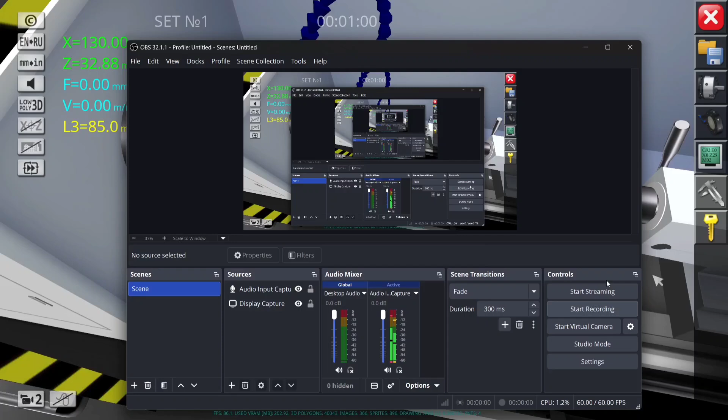Good day, I am here to demonstrate to you how to do stock removal in turning using our program called CNC Simulation Lathe Machining. So this task is assigned to us by Doc Louis Villaverde.

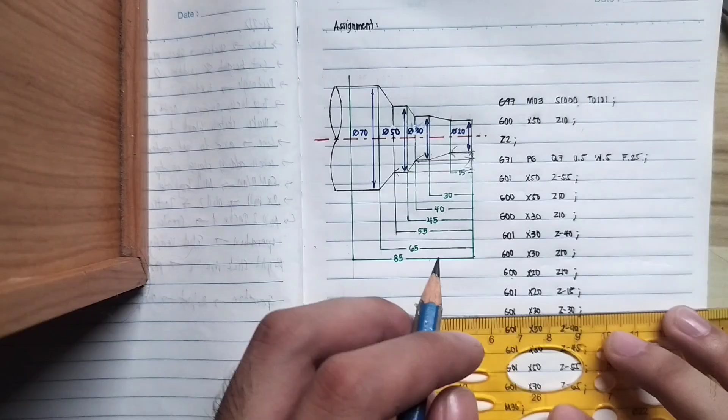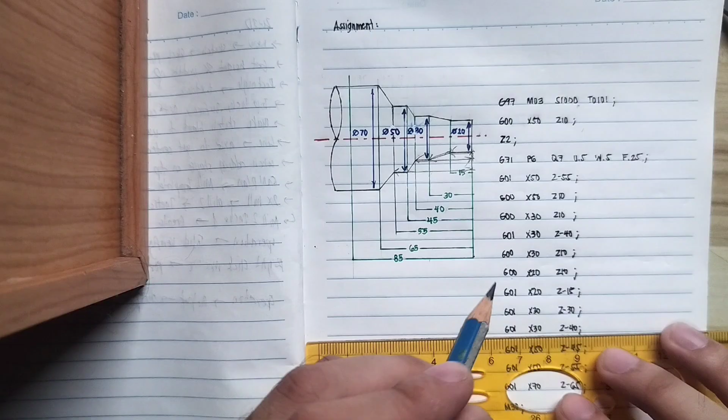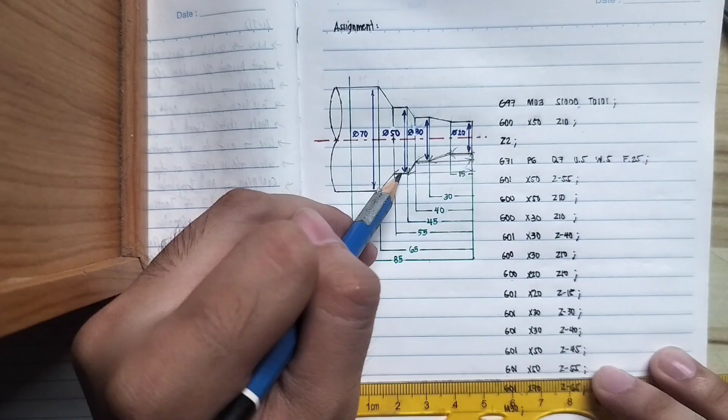Okay. From there, ang sunod na natin is G01, X30, Z minus 30 to G01, X30, Z minus 40. So ito na siya. And then followed by G01, X50, Z minus 45 right here. And then G01, X50, Z minus 55 right there. Right here. Okay. And then G01, X70, Z minus 65 is over here. Then M30, babalik tayo sa ating initial position.

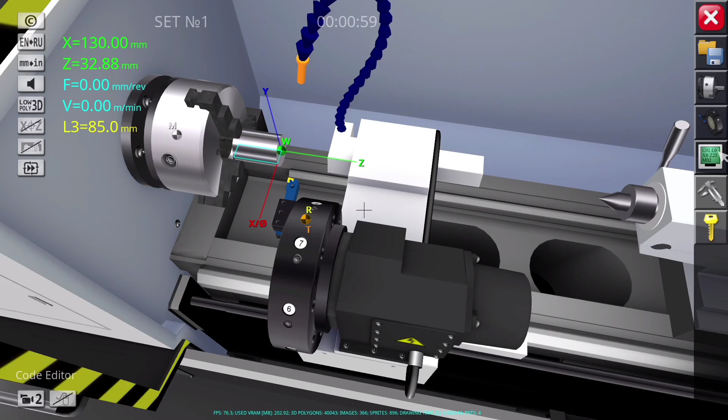For our tool, we are gonna use this one for turning. Okay. And then for our code, sabihin na natin na transfer na natin yung code sa ating program, which is ito, as we discussed kanina. Perfect. Pwede na tayo mag-proceed sa pag-turn on ng ating simulation. Let's proceed.

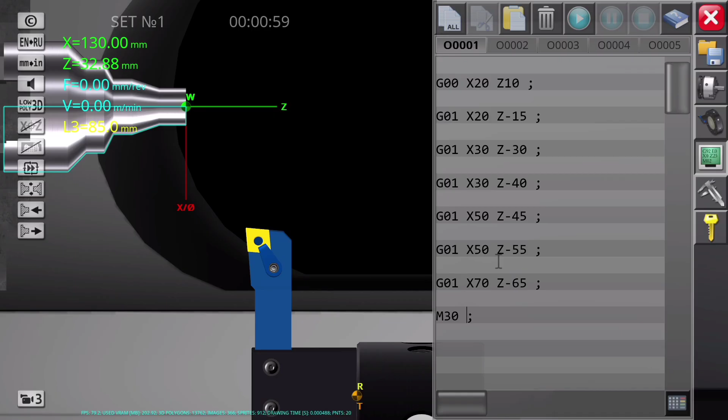So let's check using this tool. Okay, perfect. 20, 30, 50 and 70. So, perfect. Nakuha natin. Pero how about naman sa ating length?